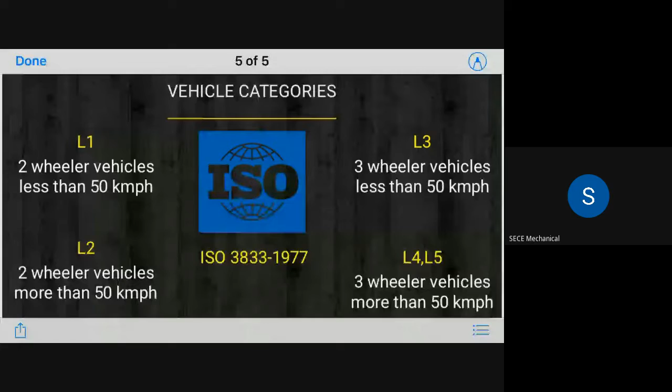This has been recently amended by the Ministry of Road Transport and Highways, MoRTH, we will be calling it. These are the major key considerations as per ISO clause 3833:1977.

When you take on L3 category vehicles, they generally fall under 3-wheeler basic model vehicles, where the 3-wheel vehicle will be less than 50 kmph, whereas L4 and L5 will be greater than 50 kmph.

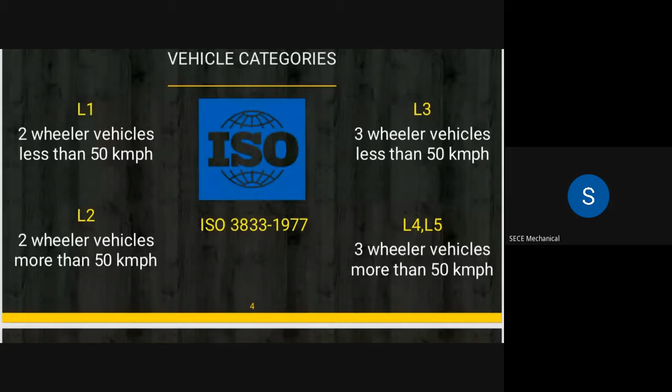So this is a recent amendment category that the Ministry of Road Transport and Highways has amended, in the 2019-20 financial year.

This is the major primary consideration factor that we have to look onto while designing and developing a vehicle. So whenever you're documenting for any approval process, they will ask the first question.

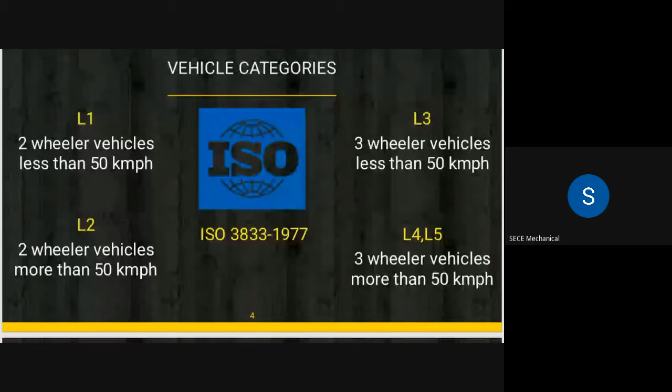Under what category does your vehicle fall? These are the things you have to majorly focus on, and also your next consideration will be load and speed.

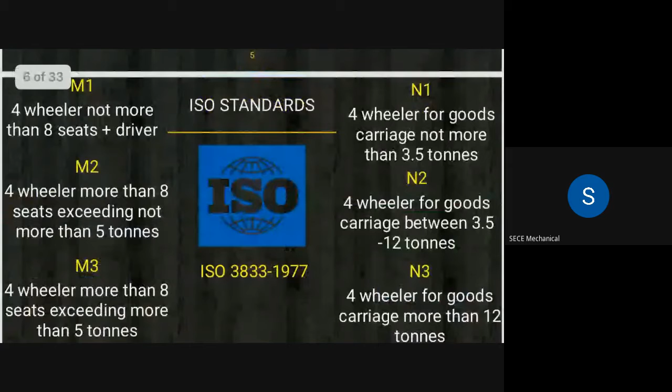This is just for your reference, because since we are going to generally deal with the 2-wheeler and 3-wheeler, this is just for your personal understanding.

As I've already said, the M and N category vehicles generally refer to 4-wheel electric vehicles of either passenger carrying capacity or goods carrying capacity. This is for your general reference, which you should know as additional information.

In M, it is basically referred to as the passenger carrying capacity, and in N, it is generally referred to as goods carrying capacity as per ISO clause. As already mentioned, it is the 4-wheeler vehicles of not more than 8 seaters plus driver.

That's nothing but your M1 categorization of vehicles. And your M2 is nothing but exceeding not more than 5 tons.

Now they have been incorporated into your vehicle weight. Whereas for M3, it is exceeding more than 5 tons, which is nothing but your heavy capacity vehicles, like your mini buses, your tempo truck travelers.

Or for special occasions wherever you're traveling, the tourist vehicles, what you call it. So those categories generally can be taken as the M3 category vehicles, your buses.

So that also falls under the M3 category vehicles. For your N category vehicles, it is completely goods carrying vehicles, which is the same as the M1 category vehicles, which has been differentiated on the basis of tonnage capacities.

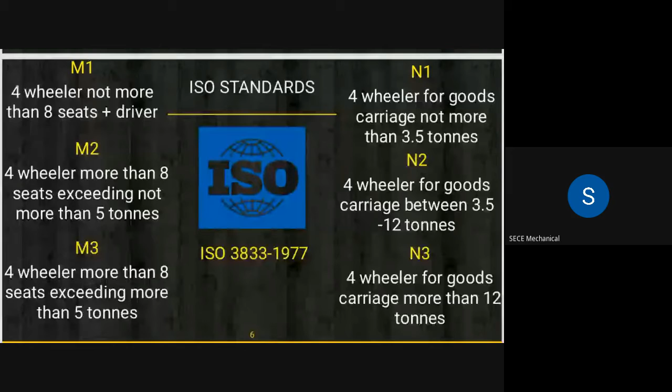So next, once you have designed a vehicle, you set your load, speed, and power output of the motor, which is available on the MORTH, Ministry of Road Transport and Highways website, as well as in the ARAI standard rules and CMVR 1989 Act. On the basis of these three common rules, you will be defining your load, speed, and power output, and based upon that you will declare the weight. Based upon that, it should fall under the subcategorized rules, say for example L1, L2, L3, L4, whatever has been given.

So if it falls under the category only, your vehicle shall be able to proceed for further test procedures. So this is one point, and the next point is what are the testing agencies currently available in India, and where you can take the vehicle for approval submission.

So these are the popular major testing agencies available in India. It's the Automotive Research Association of India, available at Kothrud, Pune, which majorly carries out all the relevant applicable test standards and certification. The next one is ICAT, available at Manesar, Haryana, the International Center for Automotive Testing. If those two are very distant, you can preferably try a nearer one, the Global Automotive Research Center, available at Sriperumbudur, Chennai.

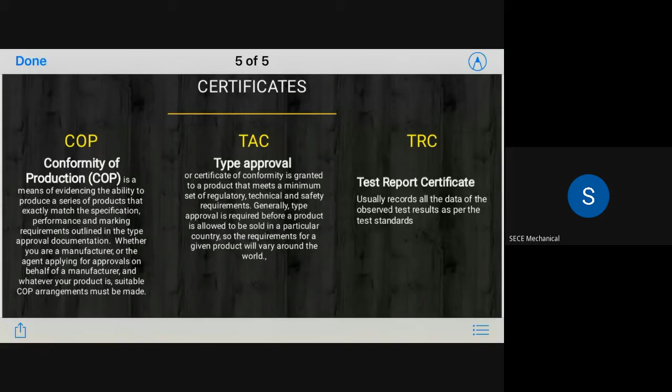So those are the major three considerations that the test agency will actually provide in order to register our vehicle, and based on that record we have to do mass production and run it on the road.

And recently you would have heard of the FAME subsidy scheme, faster adoption and manufacturing of electric vehicles. What that actually means is, if you're making an electric two-wheeler vehicle worth rupees 1.2 lakhs, and the government finds it has met all your test requirements and you're passing it, and you're getting CMVR approval from any test agency, at that point you can claim the FAME subsidy from the central government.

So what they'll be doing is affording the FAME amount for each categorized vehicle as per the central government statutory norms. For example, if you're making a two-wheeler and it passes all the tests, and you subject it to the FAME scheme with reference to that certificate, and if FAME verifies your certificate and confirms that your vehicle is meeting all the test regulation standards as per the certification norms, they will check your battery capacity, your battery warranty period, how safe your battery is, and what is the actual price of your vehicle.

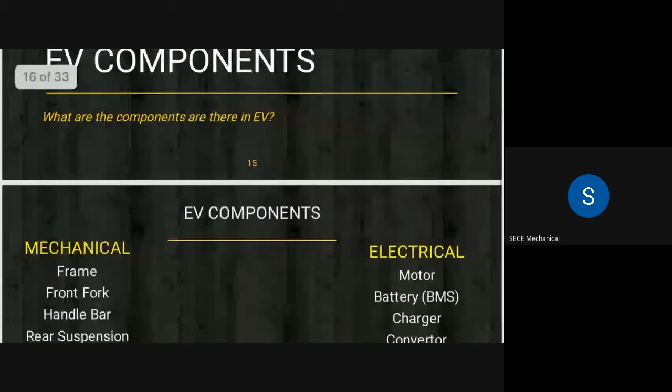They will calculate some percentage of amount at which they can allocate subsidy for your vehicle based upon these parameters. So with reference to these parameters, they'll be issuing you money — if you are making, say, 3,000 vehicles per month, and each vehicle is allocated a subsidy of 20,000 or 25,000, you will receive that subsidy for each and every vehicle. That will make for a major benefit for further investment. That's why everyone is very keen and moving on with the FAME scheme also. So that's also a major consideration.

So when we are designing EV components, they are distinguished into two types: mechanical key components and electrical key components. Mechanical key components are your general frame, your fork, your front suspension, your handlebar for steering the vehicle, your rear suspension for better comfort and cushioning, your swing arm which connects your motor and rear tire, your chassis, the rims and tires, the brakes, and your plastic panels for aesthetic looks. These are all the mechanical key components covered.

For this, when you're getting the FAME subsidy, they'll ask a separate form for these mechanical and electrical key components, getting all the details like what is the actual make, where is your supplier, and what is his address — you have a separate document for that. These are the key components for which they ask supplier details, because the recent amendment is that about 80 to 85% of the components used in the EV should be made purely indigenous. It shouldn't be imported. These are the complete major key points issued by MORTH.

On that basis, the testing agencies, when you apply for FAME, will check whether 80% of the major components are covered under that FAME subsidy — leaving aside the motor and the battery, apart from that you can make the other components indigenous, like the frame and your mechanical components, which should strictly be within the indigenous limit. That is what they will strictly be evaluating.

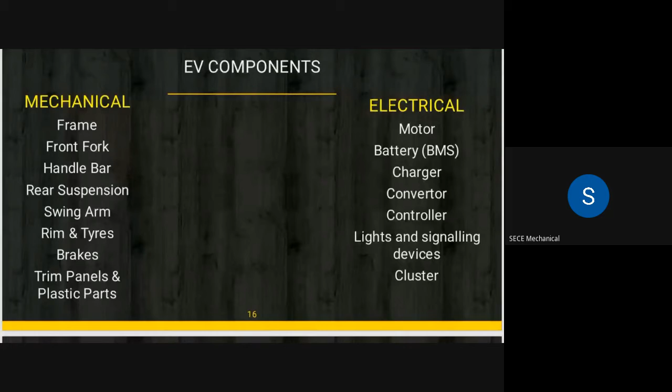Since there is no full electric setup yet and it's currently under progress in India as a nation, we can't assure that everything should be 100% indigenous. So they are giving some cushioning allowances — your battery, your motors, your battery management system can be imported from other countries like Japan, China, or Germany, wherever convenient. You can import them directly, but you should have a test certificate report which meets the actual spec as per Indian norms. So that is the key consideration factor that the testing agency will completely focus on — you currently have to be aware of that too.

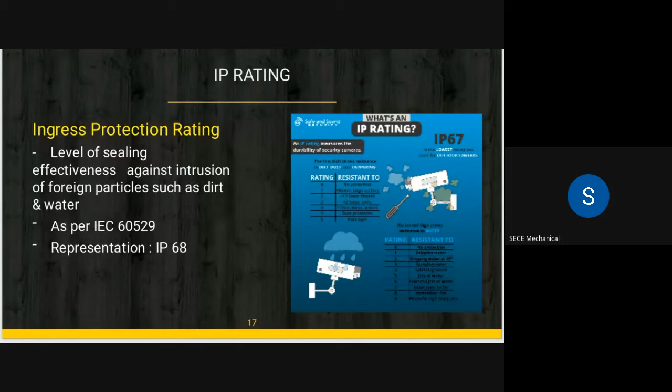The next one is IP rating. IP rating is generally carried out at AED, the Automotive Electronics Department. They'll submit your vehicle to the VRDE test track and completely immerse your motor to a depth of 0.5 to 1 meter with water filled inside that pit, as per AIS 038 rule. That motor, as per IEC 60529, should be well IP rated, which indicates how protective it is against dust and water — this rating is generally given to the motor only.

The motor is located at the bottom of the vehicle, and in flooding conditions it will get completely immersed in water. Since everything is electrical, if water enters the casing due to improper sealing, current will flow through the stator and rotor. Your motor or wire will get shorted, or the motor may fail due to water getting filled inside it.

So for that, they assign an IP rating for each specification. You have to be very aware while designing a motor, because it's not only about design and technical considerations, it's also about IP rating. You have to check how it resists dust entry and protects itself from water when immersed completely to a depth of 1 or 2 meters as per the rule. Based on that safety, they give you the IP rating, which is the safety rating of the motor.

If motor rating is IP 67 or 68, as already given in the slide, what does that actually mean? It should be protected from dust and water. For an IP rating like 67 or 68, the first digit represents whether it's free from dust, and the second digit represents whether it's free from water.

Generally in motors, for two-wheeler and three-wheeler vehicles, we go with two types: BDC and BLDC motors. BDC motors have been eliminated and we have moved on to BLDC motors because BLDC gives much more efficiency, since there are no contact brushes and thereby friction is eliminated. That's the major advantage for preferring the brushless DC motor. For two-wheelers, generally we use a hub motor, as you can see in the image.

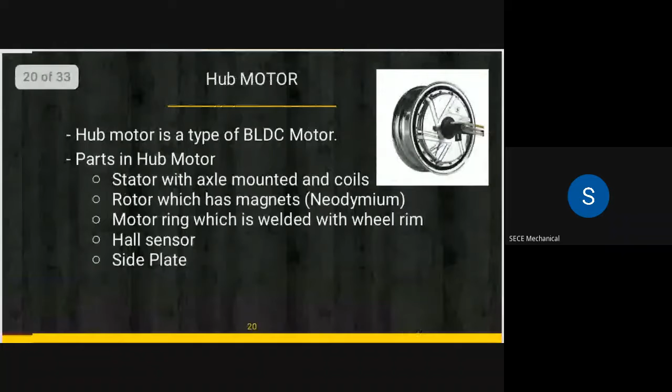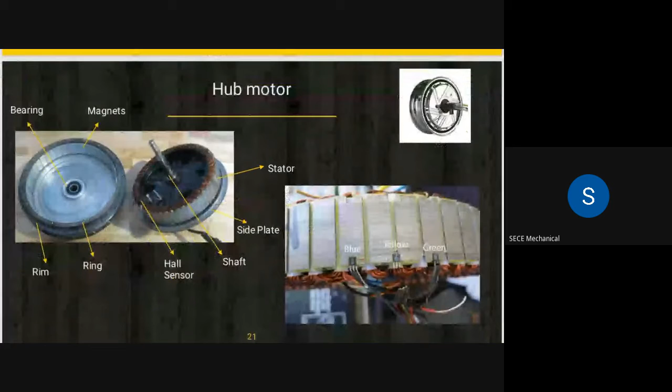This is the hub motor. Looking at the interior view of the hub motor, you can see the stator and rotor, with the magnets and rings. It generally works as a DC motor. The blue, yellow, and green terminals you see are the supply lines. Since those supply lines and electrical connections are on the stator, it shouldn't be affected by dust or water entry inside the motor.

If it's not properly sealed, your motor is unsafe because the wire terminals will get shorted. That's why we define the IP rating to be very high.

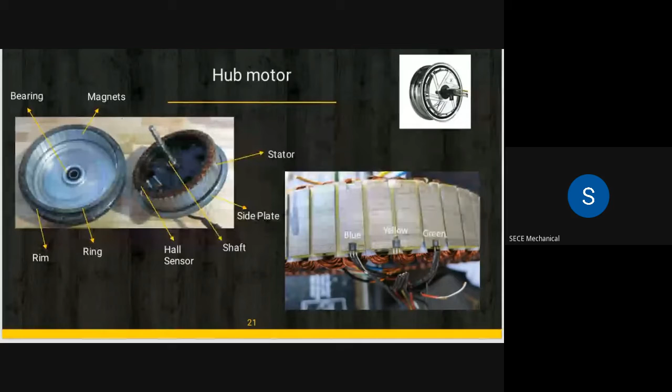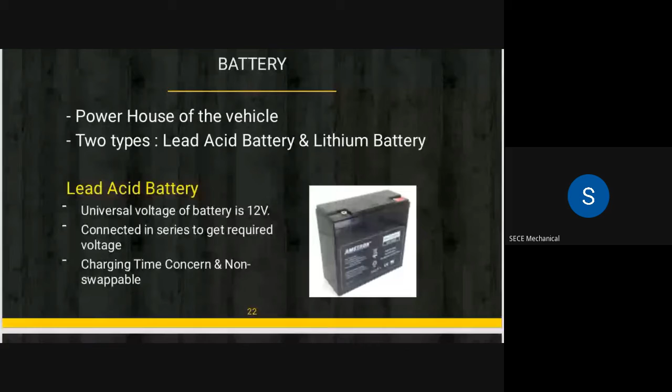In general, we are currently moving to lithium-ion batteries for every vehicle, because earlier we used lead-acid batteries. But now, even in testing and approval certifications, due to vehicle weight issues, the weight of the vehicle gets very high, and because of that, performance gets affected. These were the actual complaints and considerations competitors faced when developing a vehicle.

At that point, taking those key considerations into account, all competitors moved on to lithium-ion batteries, because with lead-acid batteries the weight is very high, and they aren't available as a single pack, only as a 12-volt or 6-volt battery. So if you want a vehicle to run on 60 volts, you have to connect 4 to 5 batteries in series or parallel so that vehicle range extends or motor power output develops due to battery capacity and high voltage.

Because of that, if you keep 5 battery storages in one vehicle, you need a lot of space - that's one point. The next is that vehicle weight will increase. The third is vehicle performance and speed with respect to actual payload, that is external load. For example, if you're designing a vehicle for a single seater or double seater, based on that consideration, your speed will also decrease.

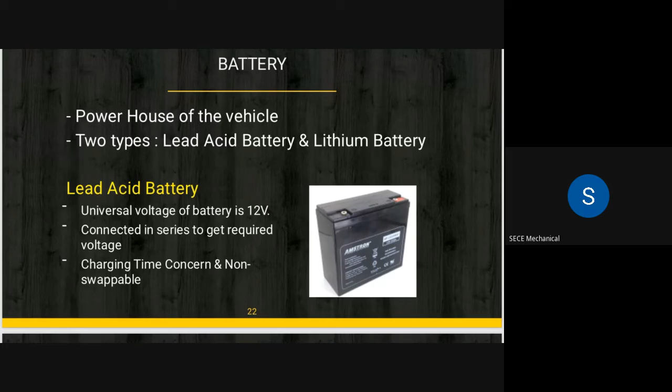So on the basis of that, many competitors have moved on to lithium-ion batteries. The major advantage of lithium-ion batteries is you can assemble the 60-volt battery within a single constituent pack, and you can save space — that's a major advantage. The next major advantage is due to light weight, your speed will increase, and the battery range of lithium-ion is much higher compared to lead-acid battery. So these are the two major advantages, and because of them the competitor has been moving to lithium-ion batteries instead of lead-acid batteries.

So as I said, when you are subjecting a vehicle for any gradability test, your battery or your IC engine plays a very vital role, because without higher initial torque you can't climb a grade properly. So you need an initial torque, or a pickup torque as it's called, to be very high. So for that, if you're designing an IC engine vehicle, you have to initially increase the torque in order to pass the grade climb test.

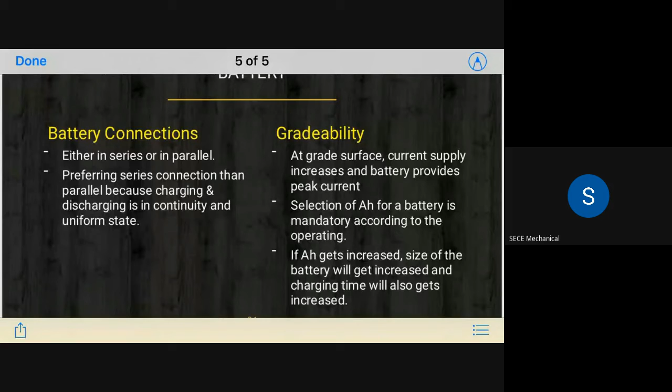So based upon that, your battery has to be a very major source, and it has to serve the purpose of making the vehicle climb. So you have to design a battery in such a way. These kind of relevant tests and factors will also be considered when checking gradability.

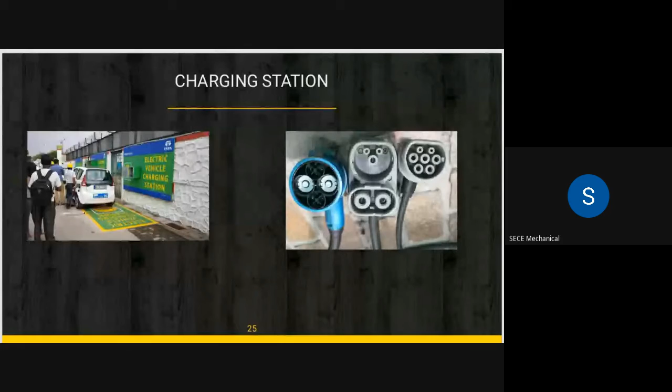And the next one is a converter. A converter is nothing but a device that steps down your 60-volt input battery line to a 12-volt output, because your vehicle's lighting system and horns are very miniature components that can't withstand a very high load — they should have only a minimal load. So it has to step down your voltage and current; it acts as a step-down transformer. It just converts 60 volts, 7.5 amps — say for example you're giving 10 amps or 12 amps, if you're giving a higher current and it's being fed from the battery to the converter, it just steps down and converts everything into the miniature voltage and current. So for that purpose only we use the converter.

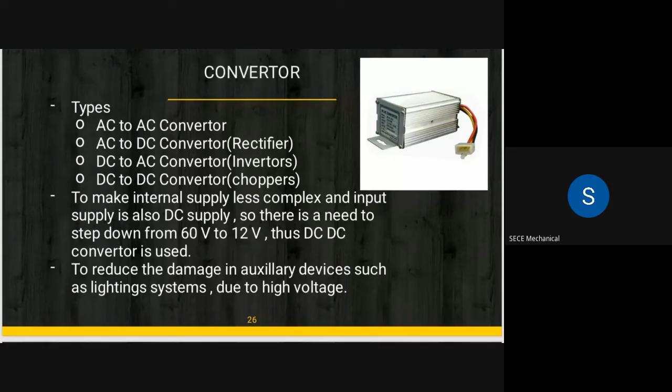And the converter won't be interlinked to the motor. It will only be interlinked to auxiliary systems such as horns, lighting systems, indicators, etc. So this will be majorly considered in SHL, Safety and Homologation Laboratory.

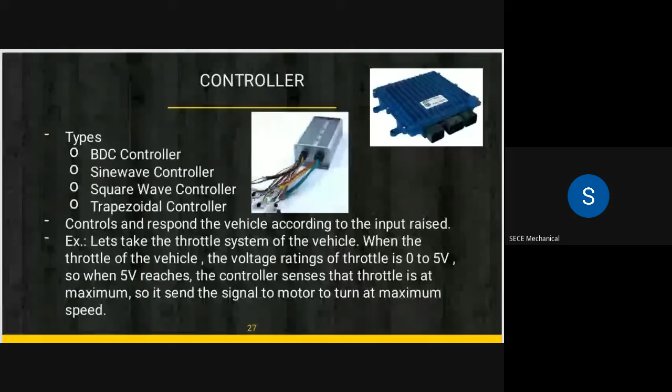So the controller is a major key factor, where from the battery, whenever you're getting a direct 60-volt line, this actually monitors and gives the relative speed to the motor, because the controller, with respect to your throttle position sensor or throttle input, senses whatever you're giving from your hand by means of a microcontroller inside this controller unit. So whatever angle you're making the throttle, the TPS senses that angle, and from the throttle it sends a signal to the controller, and from the controller you get the output based upon this angle rating. You can deliver this RPM to the motor, and the motor will generate this much speed. So to be very short, your controller just gets the input from the battery and drives your motor directly with the 60 volts based upon throttle positioning adjustments.

When you're driving a vehicle, you're controlling motor speed by means of the throttle position sensor and the throttling unit. Based on that throttle angle, the speed you're giving is monitored on the instrument cluster. There are two types of instrument cluster: analog and digital. This kind of test is also carried out in VEL, Vehicle Evaluation Laboratory, to check how much speed is reading, whether it's within the expected limit, while running it on test tracks.

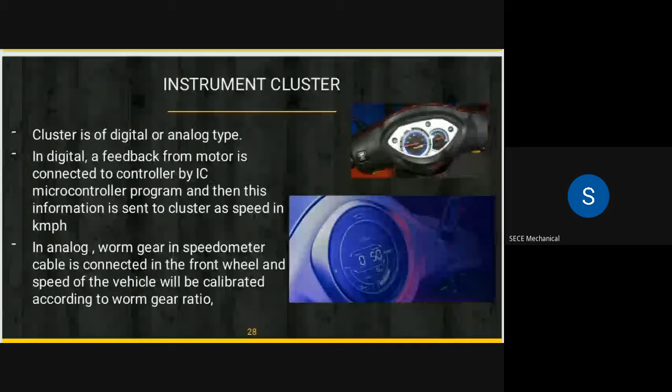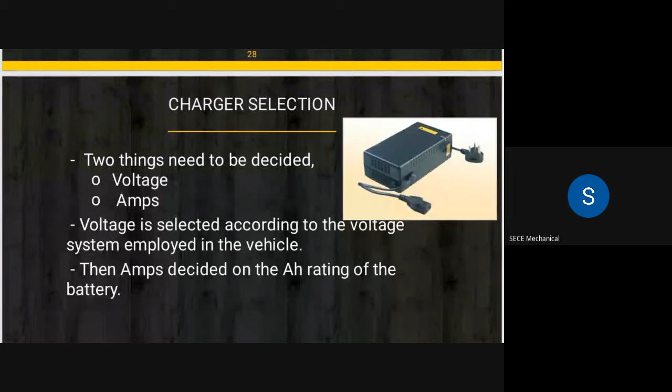This is nothing but the charger, suitable to your battery design. Whenever you're making one, you have to select the charger accordingly, based upon your voltage and current, and your BMS, whatever you design. This is a major higher priority.

I took nearly 6 to 7 months to pass the test for a simple two-wheeler. Since it moved to a high-speed vehicle, it took around 6 to 7 months, and it all got delayed because of the EMI and EMC test, which is very difficult to pass. The other 11 tests we can make succeed within a maximum of 1.5 to 2 months. But EMI and EMC is quite a big challenge for an EV generally, so we have to be very focused on that.

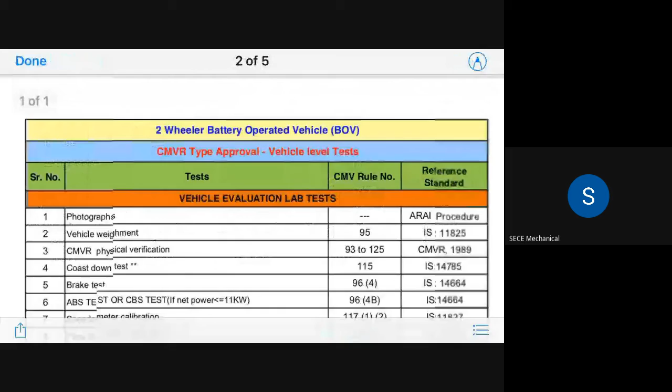So from the presentation point of view, that's it. I also have to share a few slides on what kind of test codes you have to use to test your vehicle. I'm just giving you the data. As per the testing agencies, what they'll be doing is referring your vehicle to check whether it's applicable as per the reference standard.

When you see that, you'll have your 3 vehicle evaluation laboratory centers. One is the SHL, what I've already discussed, the Safety and Homologation Laboratory. The first one is your Vehicle Evaluation Laboratory, VEL test. And the last one is your AED, Automotive Electronics Department. As I've already discussed, these are the actual things carried out in-house and also on the track.

Based on that, you're denoted with the reference standards. On the basis of this reference standard, you can check your vehicle and validate whether it's as per those standards. When you take this reference standard and refer to it, you get a clear picture for each and every norm, how much the value should be, either minimum or maximum. All kinds of tests will be available as per this reference.

When you take on the vehicle laboratory, as I've already said, it's based on physical verification, your dimension test, your vehicle weighment, how much your weight is with respect to the center of gravity of your vehicle, how much load the front axle bears and how much load the rear axle bears, and your brake test, and your speedometer calibration, which I have recently told you.